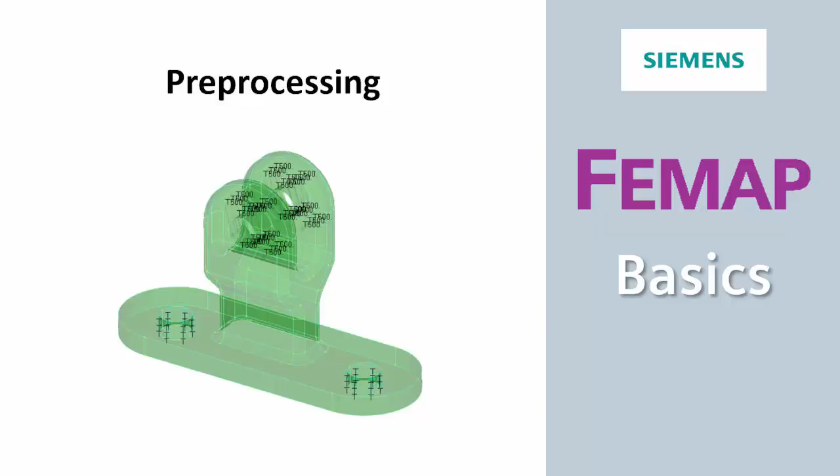In the previous video, we started the simulation process on a machined arm component and imported and cleaned up the CAD data. In this video, we'll continue the simulation process and define materials, element properties, and boundary conditions to the model.

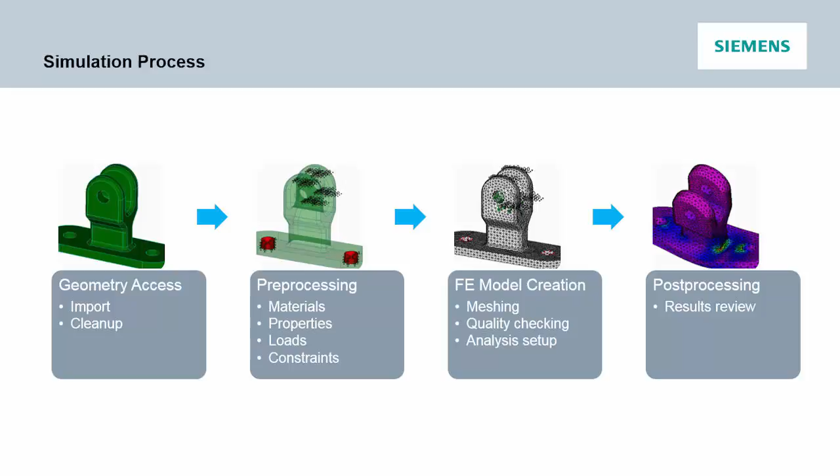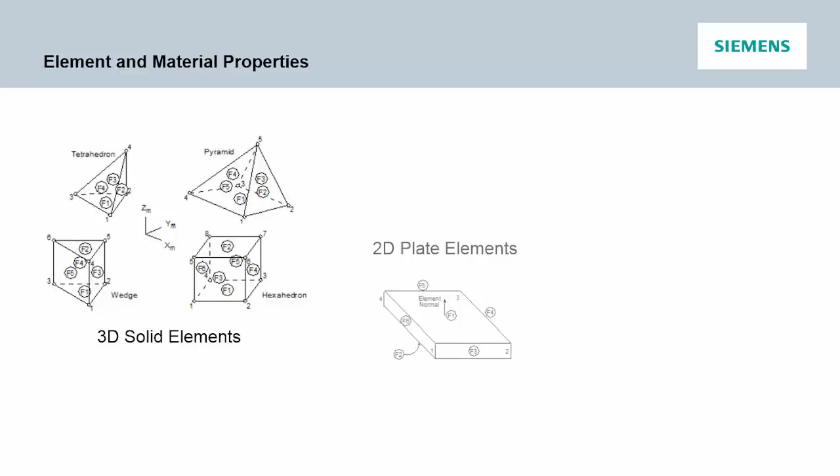With solid finite elements, the three dimensions of the element with the material definitions implicitly define the element stiffness and mass properties. However, with the two-dimensional plate and one-dimensional beam elements, further element properties must be defined, such as plate thicknesses and beam cross-sectional dimensions, etc.

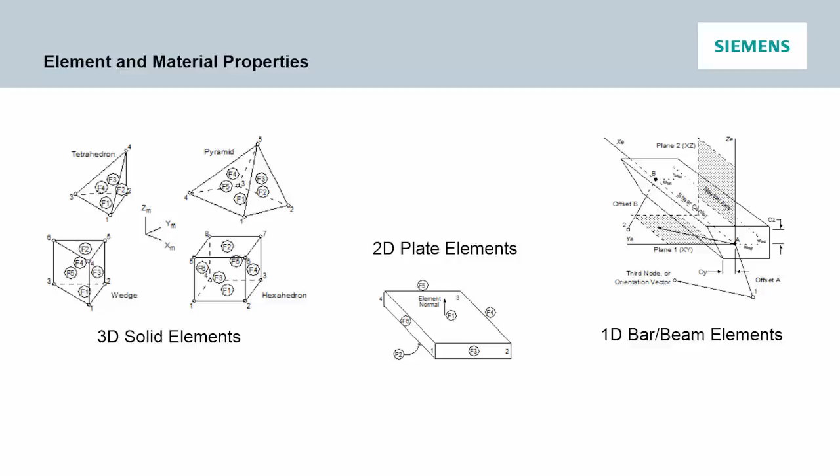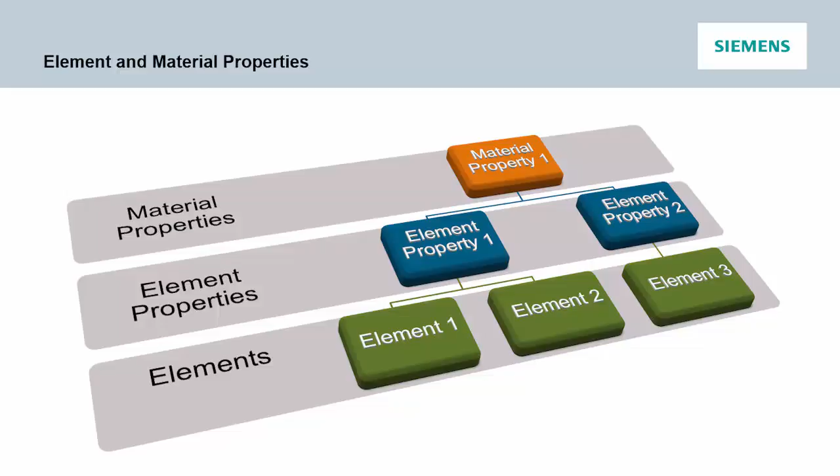The property hierarchy is such that the elements refer to element properties, which in turn refer to material properties, so we have to define both element and material properties. So first of all, we'll create the material data, aluminum alloy in this case.

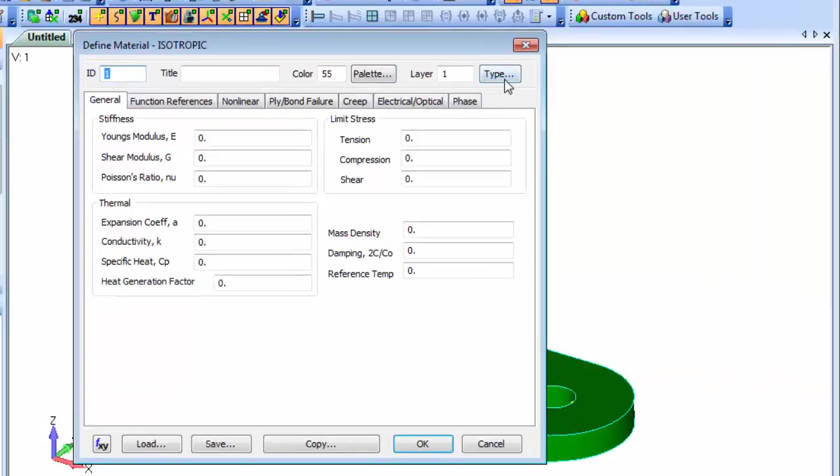To create a material, expand the model tree in FEMAP's Model Info pane and right-click on the material object. From the context-sensitive menu, select New. Note that in the Define Material dialog box, you can change the material type from the default isotropic to one of the many material types supported by FEMAP.

For this model, we'll select an aluminum alloy from the extensive metal alloy material database included with FEMAP. Selecting the material in the Model Info pane sends the material data to the Entity Editor pane for reviewing and editing if needed.

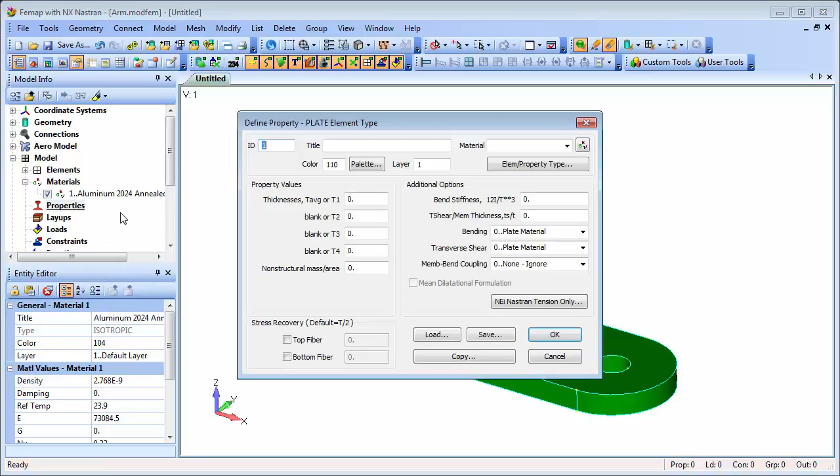To create an element property, right-click on the property object in the Model Info pane and select New. To change the property type to a solid from the default plate element type, click the Element Property Type button in the Define Property Type dialog box and set the element type to solid in the Element Property Type dialog.

Select the material that we defined previously for the solid element property and supply a descriptive title to complete the property creation.

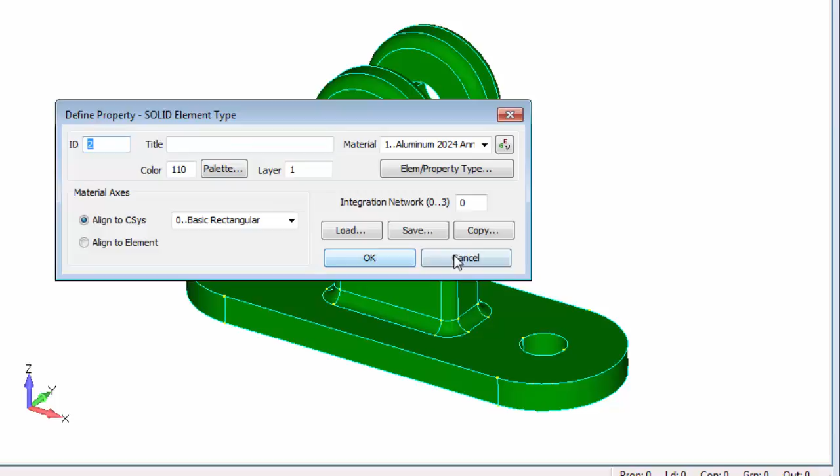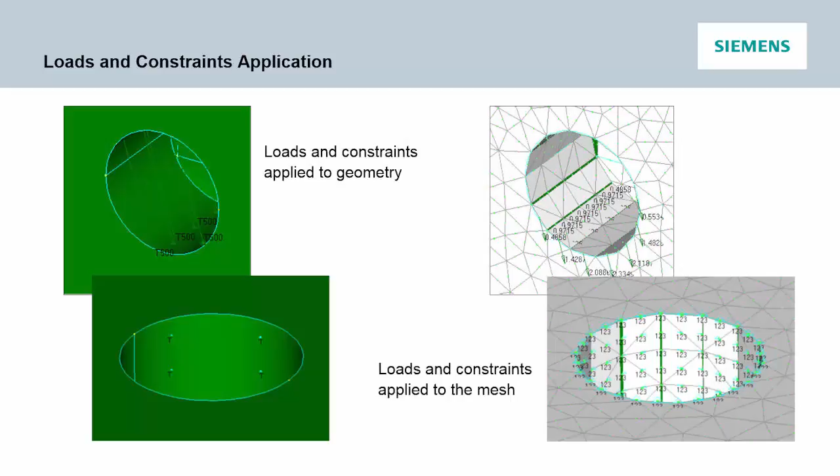Next, we'll define the loads and constraints, which can either be applied to geometry or directly to a finite element mesh in FEMAP. FEMAP manages different boundary conditions through the use of load and constraint sets, which can be combined and, for loads, can also be scaled.

To create a load set, right-click on the Loads object and select New. Enter a descriptive name for the load and click OK. Expand both the loads and the newly created load set objects. Right-click Load Definitions and select On Surface from the menu.

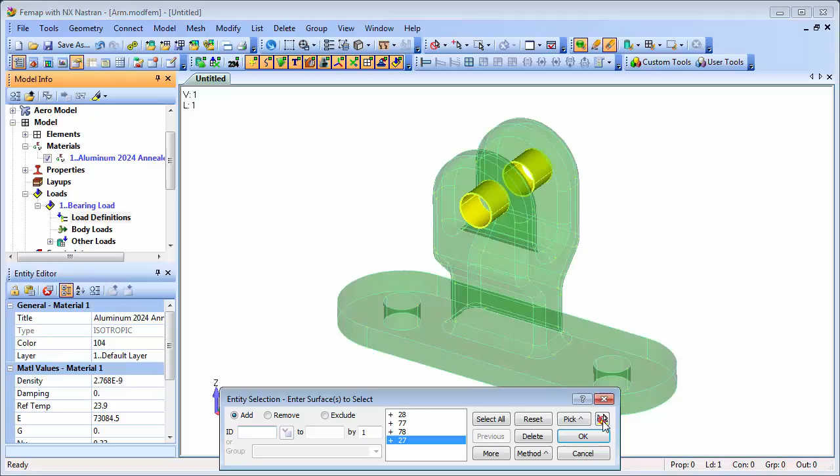Note that you can select through the part to select the surfaces that the load is to be applied to. You can select the Preview button in the Entity Selection dialog box to highlight and check what you've selected before clicking OK. In the Create Loads on Surface dialog, add a title and change the load type to bearing force.

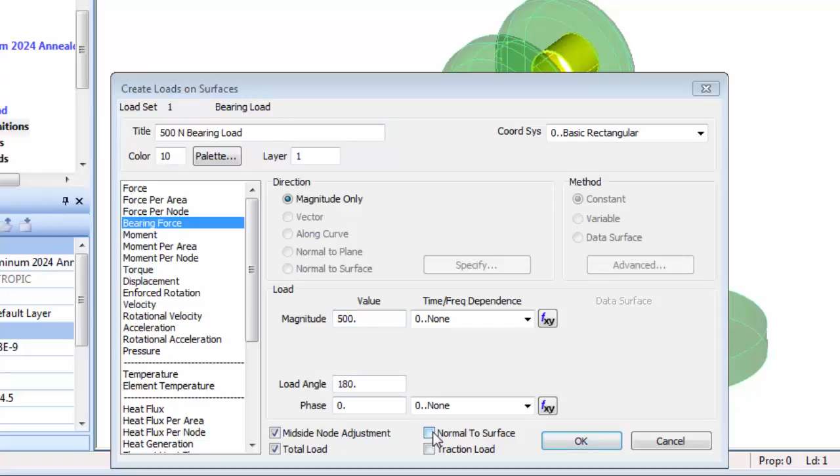Enter a value for the bearing load, which in this case is 500. Deselecting the Normal to Surface option changes the load from radial to directional. After clicking OK, we'll define the direction of the bearing load.

To change the vector direction from the default start and end of the vector, click the Methods button and select Components. In this case, the base of the vector will be the center of one of the arcs on the hole at the top of the arm.

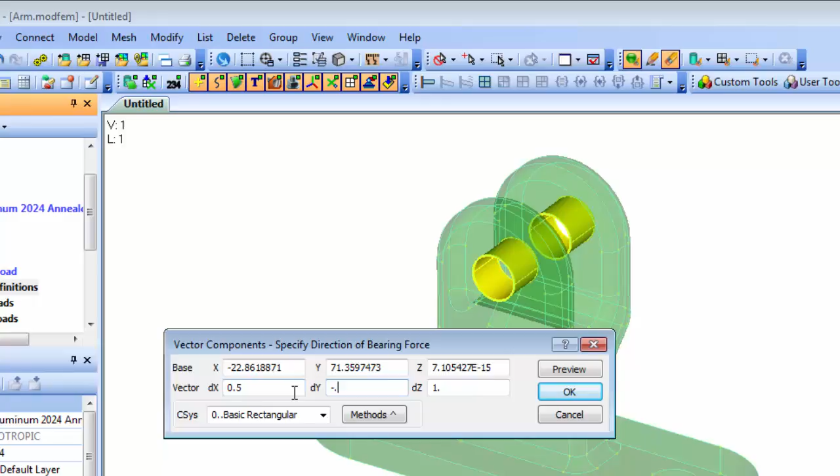Clicking the Preview button will generate a temporary display of the vector, using the values in the dialog box. The dx, dy, and dz components we want are 0.5, -0.25, and -1 respectively. By expanding the Load Definitions object and selecting a load, we can check that the load application is correct.

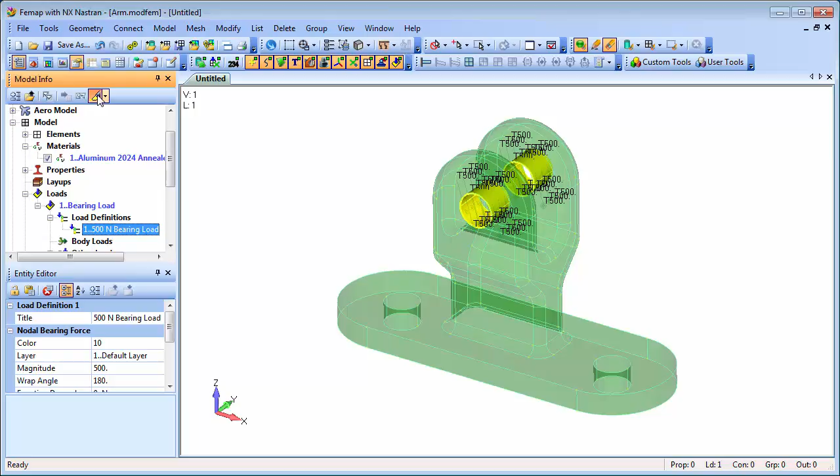We'll now apply a pin constraint on the holes at the bottom of the arm. Just as we did to create a load set, right-click on the Constraints object and select New. After entering a descriptive name for the constraint set, click OK to complete set creation.

Expand both the constraints and the newly created constraint set objects in the tree. Right-click Constraint Definitions and select On Surface from the menu. Then select the four surfaces that comprise the two holes at the bottom of the part.

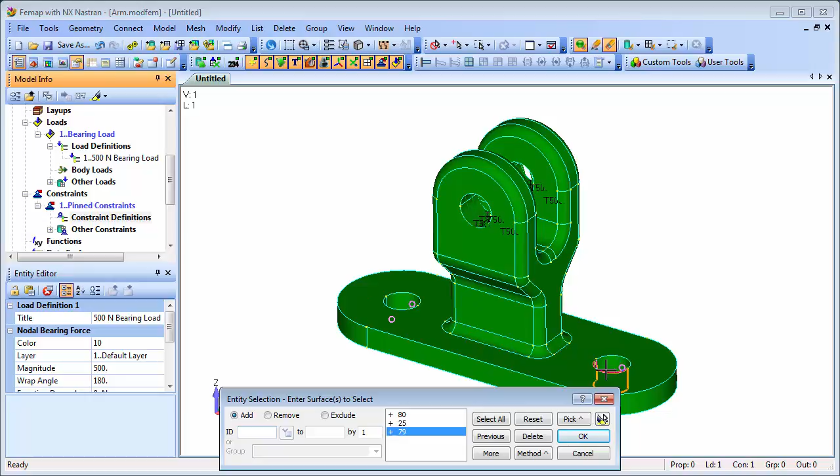In the Create Constraints on Geometry dialog, change the type to Pinned before clicking OK. Selecting the constraint in the Model Info pane, you can highlight the geometry and check the constraint definition.

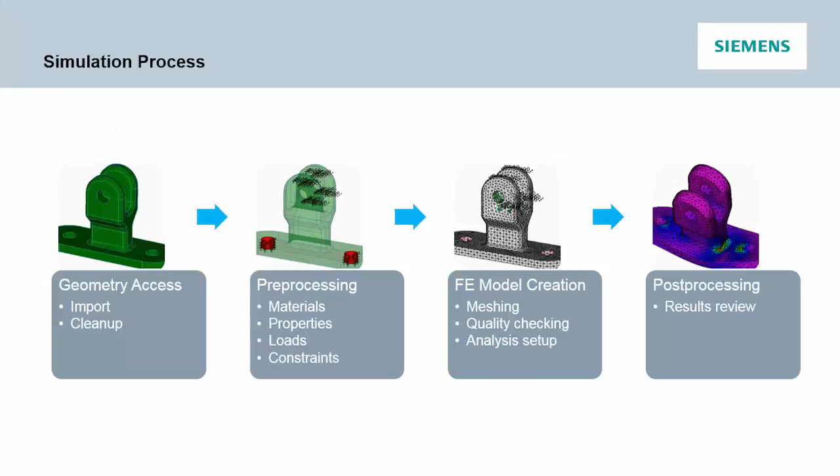In the next video, we'll move on and mesh the geometry to create the finite element model, then set up the analysis parameters and output requests for the NX Nastran solver.